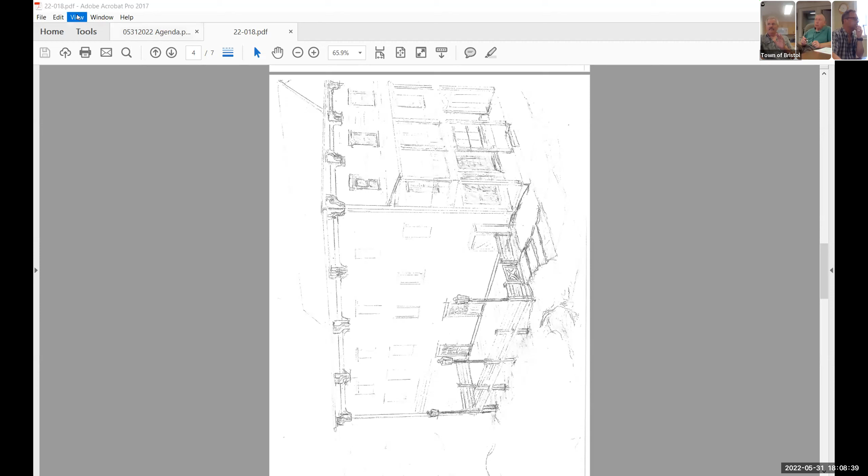So my proposal is for a deck for seating outside, and there'll be access through an existing window on the right. Well, it's going to be a door, but the deck is on the east side of the building. And there's, well, you see the two doors.

There's a window, well, there are actually windows, one, then there's another window, there's a bunch of windows in there boarded up. So I'm gonna use the same openings. And I'll start with the one door on the right, and that goes into that little office area, next to, I don't know if you've been in there recently, but there's a small room.

This will be out the north end of the bar. It'll be off the east end, yeah, but this is on the east, north end of the bar, so you have access to the deck. The access to the outside is only for emergency exit or handicap access.

Right there in front, the little gate. And the other door will be for servicing the deck.

What's the width of that deck? That's 14 by 36, and it may not be to scale.

Okay, now what impact does that have on your parking? I've already moved the parking around, the drive. So basically it's taken the place of the drive that used to be down there, and I used to drive and park here, but I filled it, have you been over?

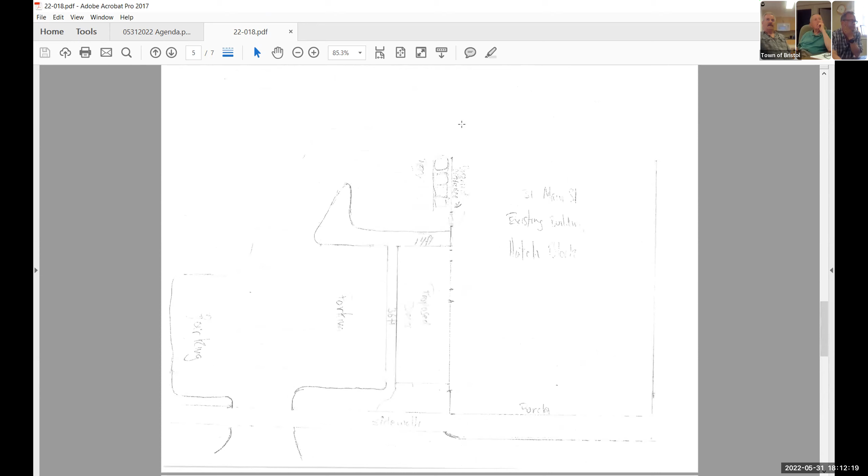And there's 10 piers, so I'll carry it easily. Will this be painted or stained? It can be whatever, but pressure treated, you gotta let it sit anyways.

So for right now, it's pressure treated, standing as is for at least a year. Right, and the railings may be not, the posts probably won't be pressure treated.

I had a couple of thoughts, I was thinking of just a 4x4 steel, hollow steel, nice rounded, and then just open to thoughts here on that. But I guess it's whatever you guys approve.

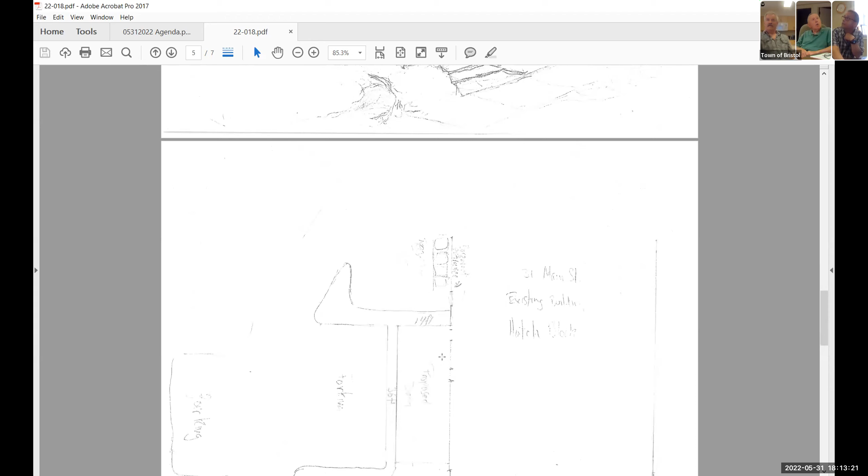And the other part is here too, Pat, where you're covering the utilities on the end of that. So on the north end of the porch, right here in this box currently, if you look at, gotta rotate, there's meters there. Is it really boxed in?

Well, open, but you can access them, and you can see them, you can sort of see them here, yeah, this is where the hide box is for the meter. I thought I had a deal going with Green Mountain Power, but they decided to hold off.

Hey Chris, yes, if you set me as a co-host, I have some photos I took today. I was looking at it, if we want to see those in terms of the side of the building, a better picture.

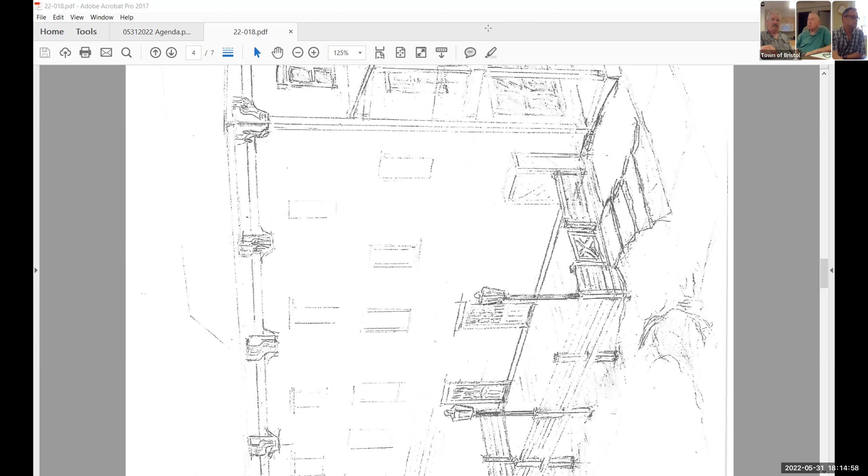Do you have a particular light fixture in mind? Oh, I like something kind of colonial looking, like those light fixtures on top of those poles. Yeah.

Now, what's our requirement on lights? Do they need to be shielded down? Yeah, you shouldn't see the source - that's good, you can see the light but it doesn't broadcast upward and outward, and nothing fluorescent. In my opinion, something soft. Sure, I agree with that. I like the lights you guys had in town, but I don't care for them now - it's kind of loud, I think.

Remember, you're new in town here. Yeah, no, be careful.

Here, let me share that photo, Chris. It's all yours. Okay, there we go - so that was taken... oh, there it is, yep. I did go to school here.

So I have a couple questions. I was looking at your line in terms of what your height's going to be. It looks like you're going to have to do something to hide your utilities, but you're also hitting a couple oil filling areas and potentially a propane line - is that correct, in the middle of the building there?

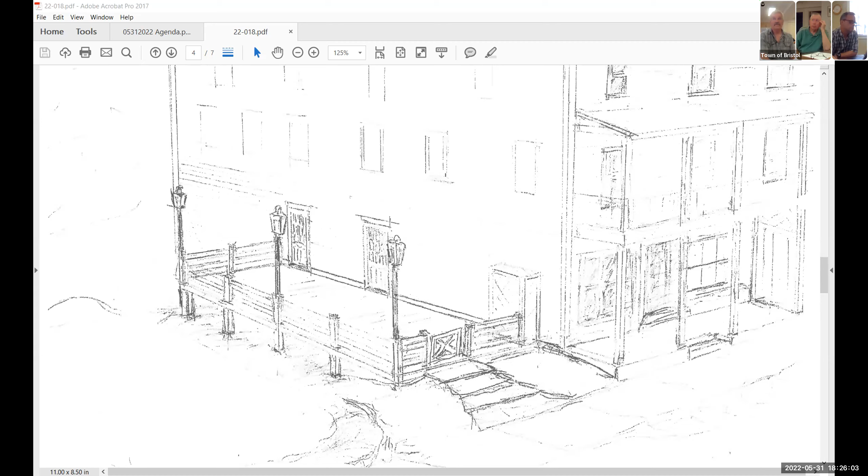It'd probably be better for the wheelchair, having handicap accessible rather, which will be the other bonus by doing this. This will actually bring the bar portion of that building up to ADA compliance. Currently it's not ADA because it's not required to be.

Right, so that's sort of this deck, but it will be at that point, right? This will trigger this. Anyways, yeah, yep, yeah, I've been through them.

So I guess my main thing, I'm in full support of the deck. I think this is a great idea and a great project, and I think it will greatly benefit the business as well. My main concern is that there aren't enough specifics of how it's going to look. Generally, for the Design Review Commission, we're evaluating and approving or recommending on specifics. And because you haven't locked in the exact materials that you're using and the exact look, it's hard for me to imagine the deck as a final thing.

And I have concerns that something that I imagine, or another person might imagine, is going to be different, and then when we see the final thing, perhaps it's different than we all thought it would be. So that's my main concern.

I'm more than happy to support it, but at the moment I'm hesitant to, just because we don't know the specifics of what the lighting might look like, the galvanized and the metal. And I don't mean to be rude, but I need to have more detail, like here's what I'm going to use, this is what it's going to look like, and I'm definitely going to use this, as opposed to I'm thinking about using this, or I might use...

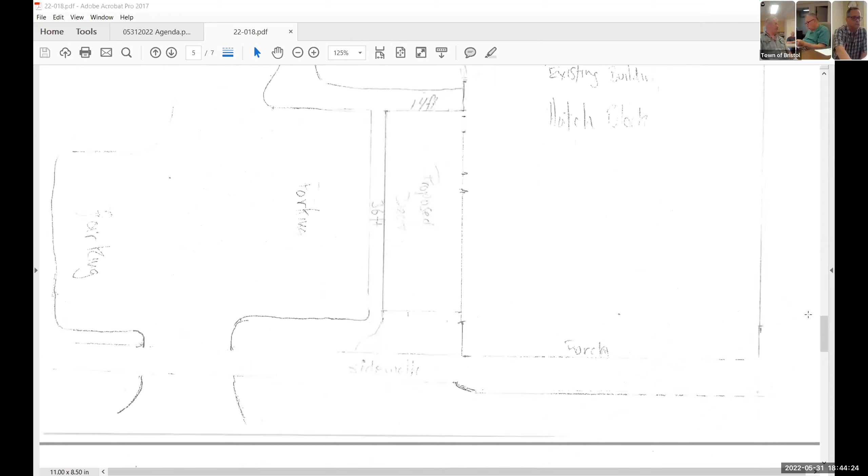Access to the back deck instead, so it actually gives another exit other than the building, into the hall. Not that it's a whole lot of difference.

Do these two doors replace windows, or are they new? One's going to be a new opening, and the other one's going to replace a window. The one over the bar side will replace the window.

What are these doors going to look like? They're the 15-light doors. Are the finishes on the doors going to be similar to other doors on the exterior of your building? Well, it's a little bit of everything on the building, I think. There's a steel door on the back of the hatch block, and the others are probably 6-panel, but most of them are metal doors.

This is going to be a metal door with glass, so it's going to have a glass center and lights. And again, when we meet, we can look at samples for these as well.

I actually have one of the doors already — took a picture of it. I was uncertain on the door, but I think that's probably the same type of door I'll do on the bar.

I don't think we have any problem with putting doors in, because it's another escape in case you have a fire in there. Right, but it's a matter of what it's going to look like on the exterior.

So Pat, at the moment on that 3rd floor apartment, they would go to a door in the hallway, and the hallway is the single exit onto the deck. These two are just proposing doorways from each apartment onto the back deck — one is a window and one is new. Okay, good, I just wanted to make that clear.

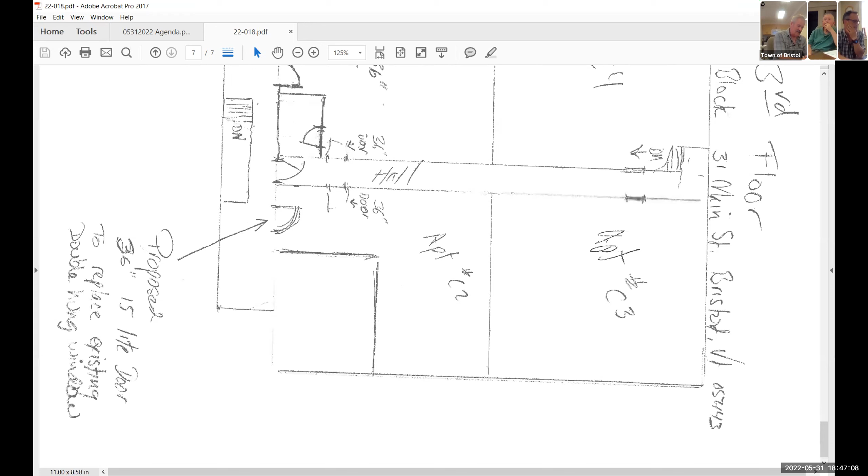On the 3rd floor, there's an existing window, so I'm going to use that. On the apartment over the bar, the other one — the way I did it, there's a step in the living room, and the porch ends right there, and there's a window there which I'd like to get rid of at some point, but I'll have to talk to you about that. I want to put a window further out, over the windows below, so it looks better.

But now it's got the crank-open, awning-type windows, not a double hung. The door is going to enter on the deck, and there's nothing there now. The window that's just off from it, I'd like that to eventually go away, and I'll put a double hung further out, a larger window.

But those two doors will not match the ones below. At some point I'll change those out so they match.

It's one of those catch-22s for the landowner and building owner — having enough capital to do it all in one shot versus coming up with a concept. This is phase one, and we're waiting to see phases two and three, which we're all waiting for. In all honesty, I'm excited to see upgrades to this building. It's needed some TLC for a while, and the fact that Pat's stepping up personally is awesome. Yep, I agree.

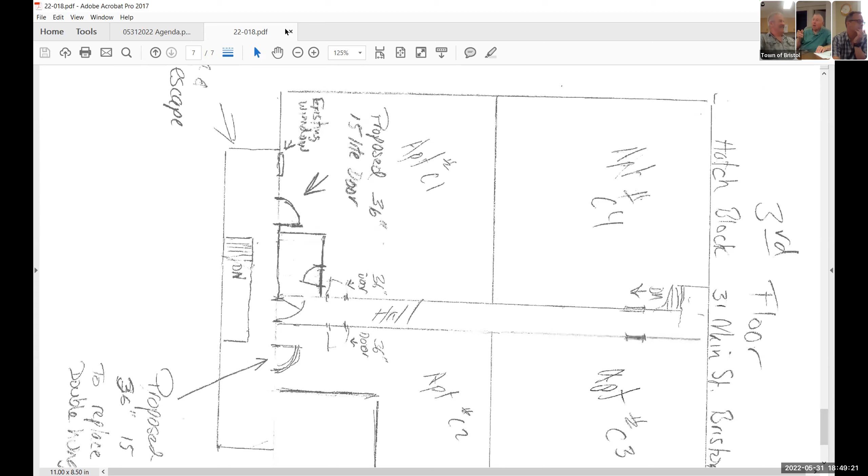I've got to apologize for a shortcoming — I know I rarely make mistakes, but that's my wife. Anyhow, I'm Ron LaRose. Sure, okay, this is Liz Herman. Nice to meet you. He's just a guest. And here you've got Ian, who's been chatting. And one you don't see is Slim Pickens. I got the sound to work. That was good — well done, Slim.

Cool, all right then. So your next step is getting together, meeting with Kristen, and then getting together.

Chris, I would recommend, if you can, print out the section from the zoning regs of the design review area, if Pat doesn't already have it, so he can see the criteria we're going to be looking at. That might help him. I haven't given it to him yet, but I have a checklist I can get to him. It's always useful, it's what we follow and what we'll be looking at. As long as you go down and say, okay, scale, I've got that, I've got this, then you should be set coming in. We'll just knock through it. Okay, cool, I'll get that for you.

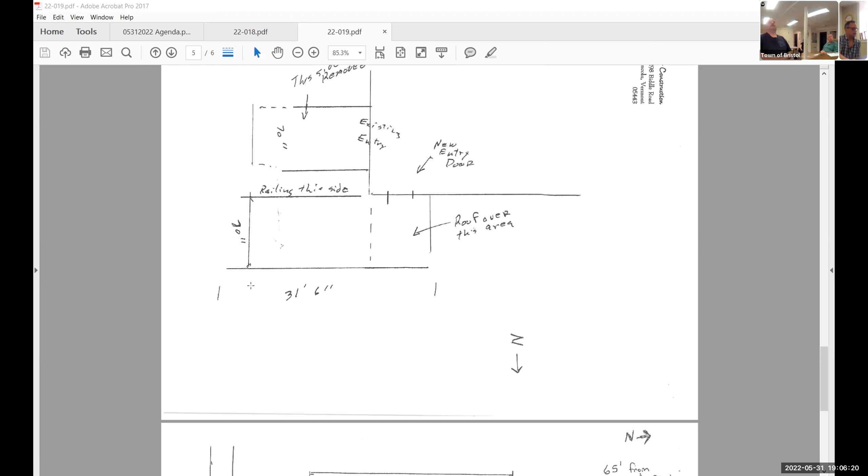If the sidewalk was where people walk to fill the fuel tank, it would be like any other place, and then they could turn left and go in underneath the portico. So move this sidewalk here and have it run, and they would just walk in. Move it out another, say 5 feet - that's a very good idea. Because you have plenty of land, you're not going to run into your property boundary.

I don't know how wide you need that sidewalk, but make it as wide as you need, and have it turn into the portico - maybe 5 feet or 4 feet, whatever you can live with. That gives you room too, if you need to put brackets underneath there to support it, you're not going to bump into it as you approach from that side. That fuel filling area is just grass now, so you'd want to look at that.

I think Slim's suggestion is a really good one. It's probably going to add a little to your budget, or maybe not, because you're going to be doing some additional sidewalk or concrete right at the door entrance since you're shifting it - you're creating an L shape. But that does make sense in terms of getting as far away as you want from that roof and the potential of anything falling off it. It should still seem like a nice way to go forward and then left through the door. Maybe it only bumps out another 2 or 3 feet from that north side wall to clear the roof.